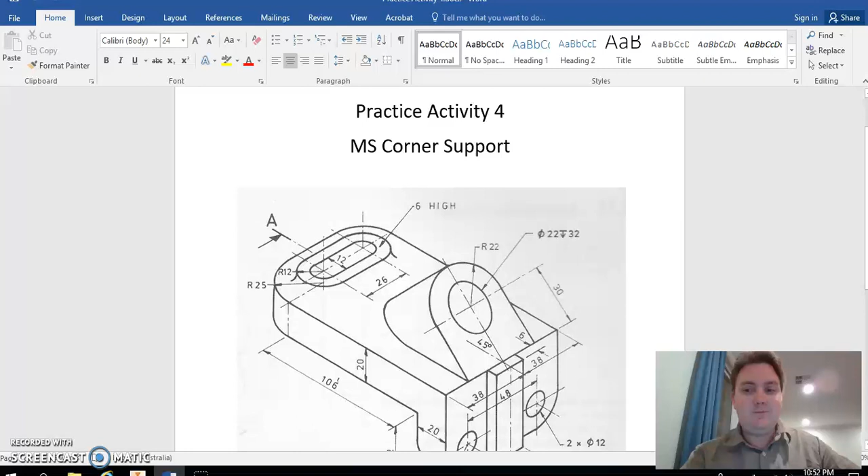Okay, welcome back. Up for practice activity number 4, the MS corner support.

Okay, now this one has some tricky features. It's got this embossed slot here with a radius, a fillet that goes all the way around. It's got this 45-degree feature here, so that's going to trick a few people. I've seen it done numerous ways. Some hard ways and some easy ways. I'll show you the easy way.

And then the rest of it is pretty straightforward, isn't it? We've got this, we've got some fillets, this little boss here, lots and lots of holes. We've done lots of holes so far, so it shouldn't be too tricky for that. The real tricks are going to be these ones here, this feature over here, and this feature here. Okay, so let's get started.

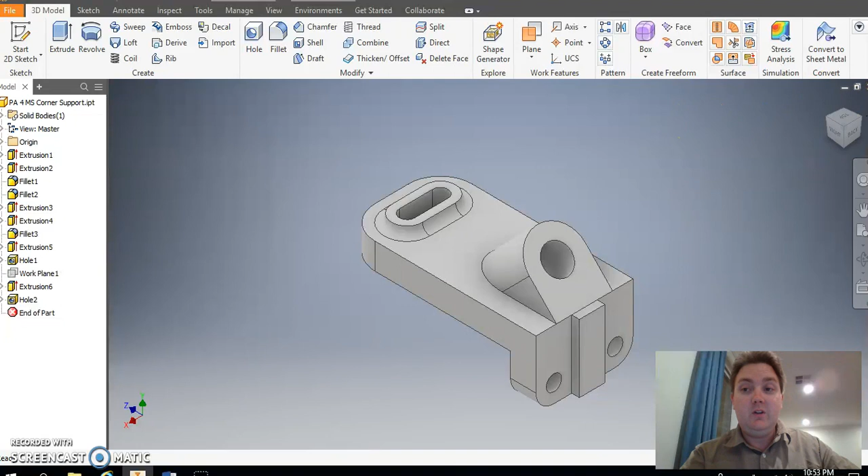Here it is fully modeled. Now I won't go through this because I want it to be a bit of a surprise as we get there. So let me just close that down. Brilliant. New part, new, metric, standard millimeter, hit create. Okay, let's have a look.

First thing I'm going to do is I'm going to create this upper section here. Okay, it's 106 plus 20, so that's 126 plus another, gosh, what would that be? Plus another 25. Okay, so 106 plus 20 plus 25. Okay, and it's got a width of 38 and 38.

Gosh, that's a lot, given how late it is at night.

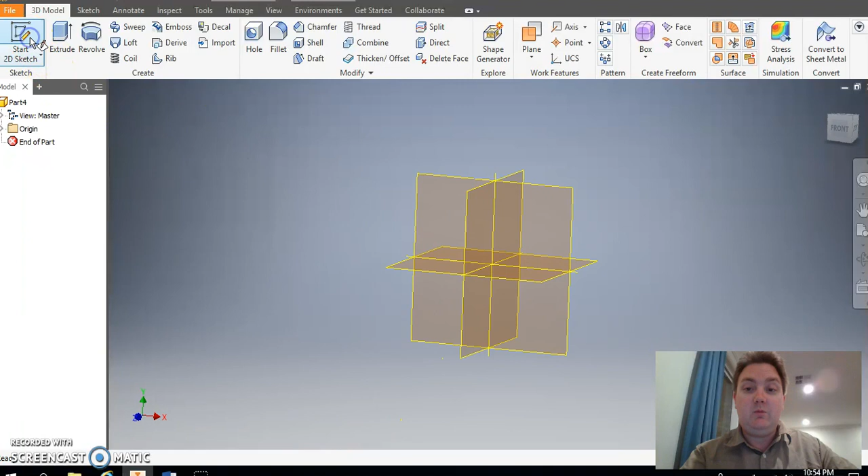So let me just open up this, start with my sketch, and let Inventor do the hard work for me. Let's create a rectangle. Oh, selected that off, cancel that. Let it jump onto the origin point here. I'm just going to click that in, hit OK. Now the first one is 20 plus 106 plus 25.

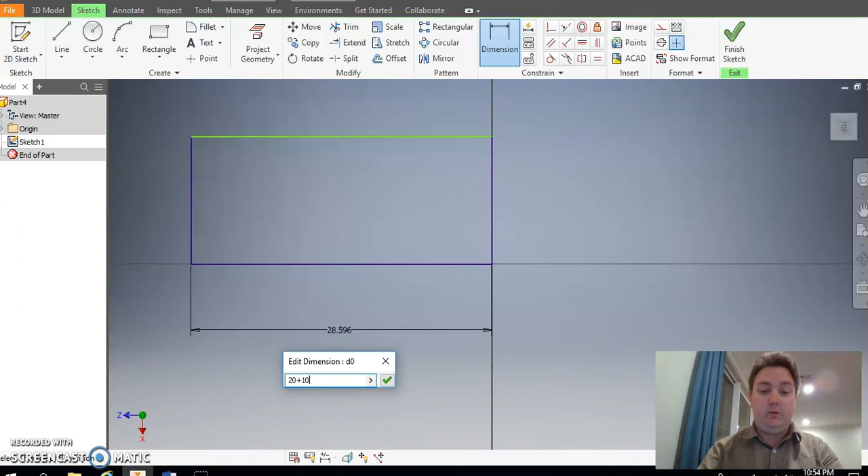So it's 20 plus 106 plus 25. There it is. That's jumped out of screen. Let me hit my top here. See, I'm not doing too good on this one so far.

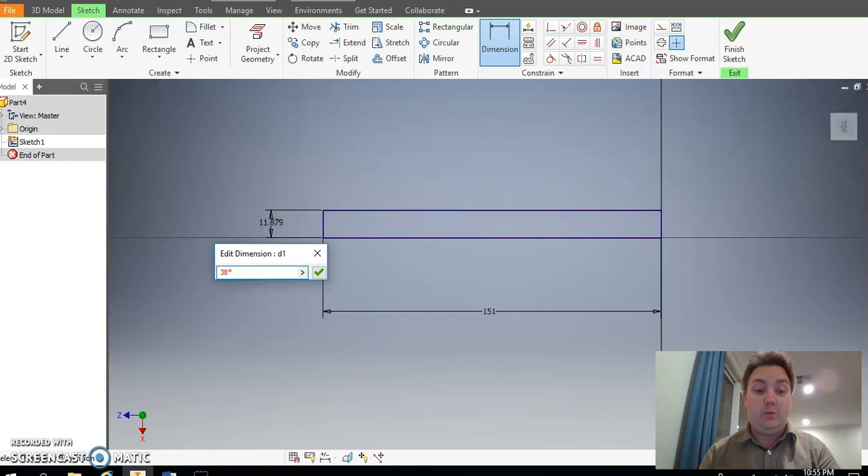And add the dimension in here, and that was 38 plus 38, or 38 multiplied by 2. So let's go 38, and the star button is 2. Okay, or the multiply, sorry. So 38 multiplied by 2, and let's center that. There it is there. Finish the sketch, and I'm going to extrude that down 20 mil.

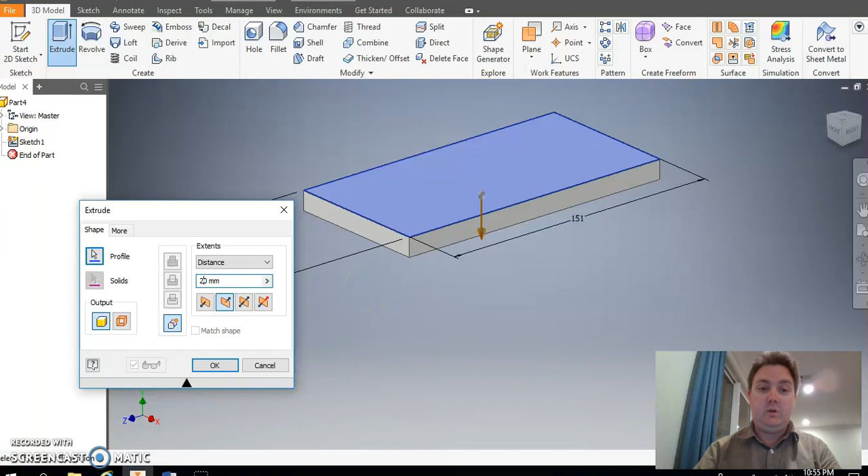Enter. Okay, and I'm going to just rename that. I'm going to call it the top. Okay, I'm going to add 2 fillets on here to create that radius. So it's got a radius of 25. So I'm just going to create that feature now.

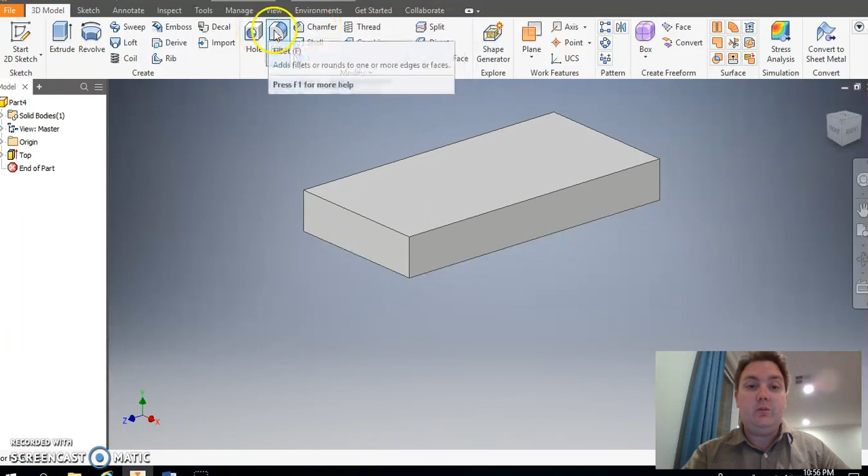Now remember when we added a chamfer? Well, we've got another feature called a fillet. So I'm going to select the 2 edges. That's that feature just there. I can select multiples at a time if they have the same radius. Okay, and that was 25 millimeters.

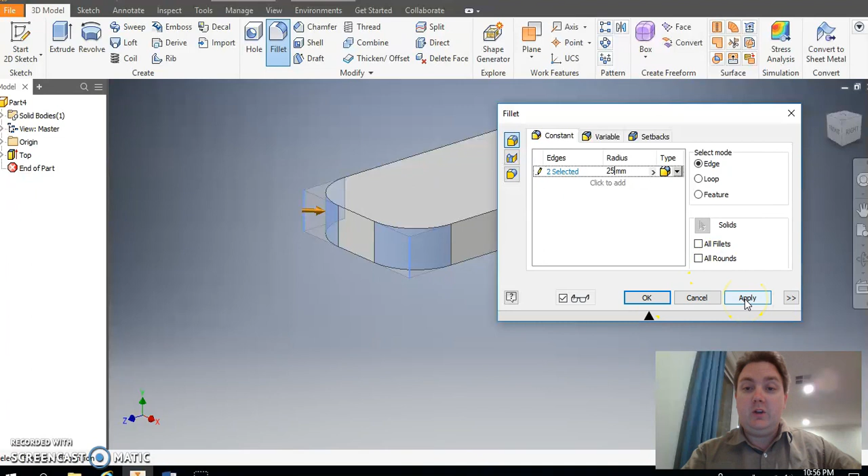And hit OK. If I'm doing lots and lots of them, I can hit apply and then go again and go again. Okay, but since I'm just doing that, and there it is. So there it is back there. Let's create this bit down here, which goes down 32 down from that corner. Okay.

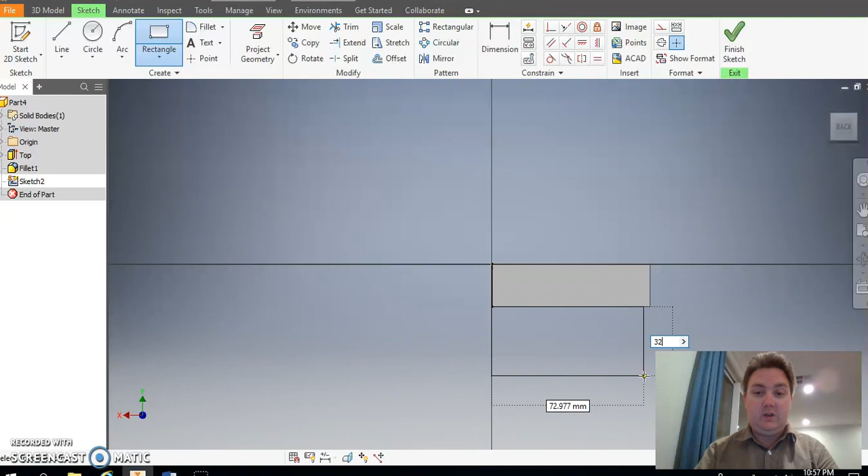So I'm just going to create a rectangle from here, and it'll have a 32 down. And you know what? I'm just going to leave it like that. I'm going to show you a trick. And dimension, this one here. Can I create a dimension between 2 model edges? Huh. Interesting.

I'm just going to delete that. I don't know exactly what the issue was. So what I did is I'm selecting these two edges here. So it's giving me the distance between those edges. It's saying that it's a driven constraint, meaning that the constraint or the dimension already exists. I can't change it, but I can use it to reference.

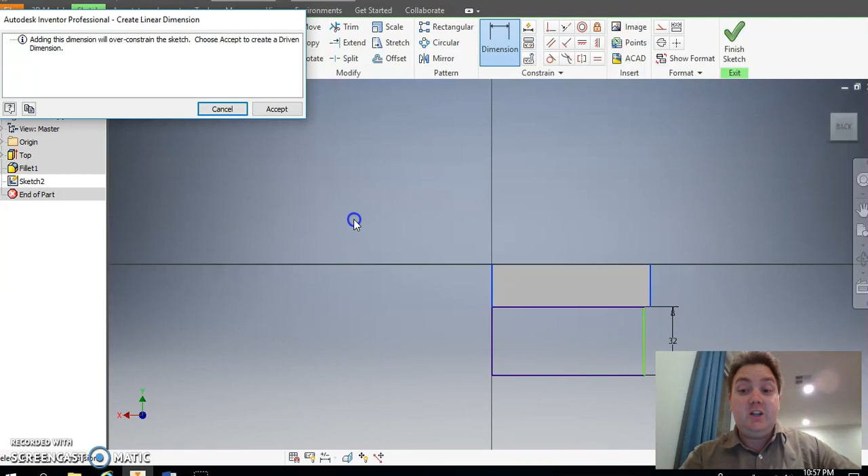So I'm just going to hit accept and see it's a reference dimension or a driven dimension because it's got those brackets on there. So now when I add this dimension down here, I want it to be the same as that one. So all I have to do is select it, and there it goes. Okay, I'll just bring that over there so you can see that. Okay, finish the sketch.

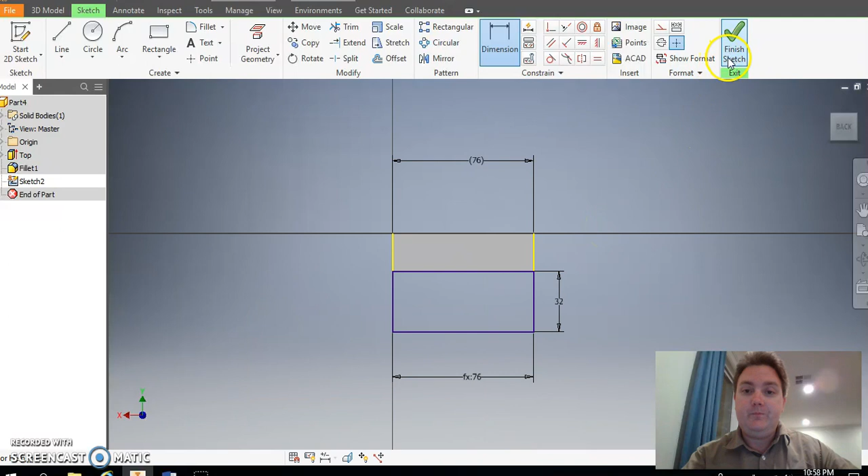And it's got a width of 20. Other direction, join, 20 mil. Okay, there it is, blended in. Do those radiuses, so 14 and 14.

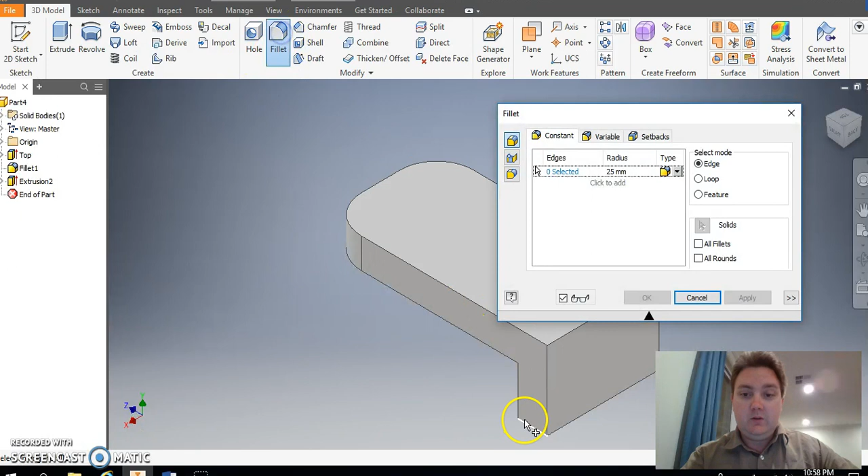So fillet command again, jump over, up 25, 14, hit OK. All right, so I'm moving through some of this pretty quickly now because I'm expecting that you're going

to get the hang of it, and I'll slow down a little bit when we get to the tricky parts. All right, we're pretty much at one of those tricky parts now. I'm going to put this slot in here. Okay, it's going to be done in multiple stages. The first one I'm going to do is going to be 26 wide or between the two centers, and it's going to have a radius of 12.

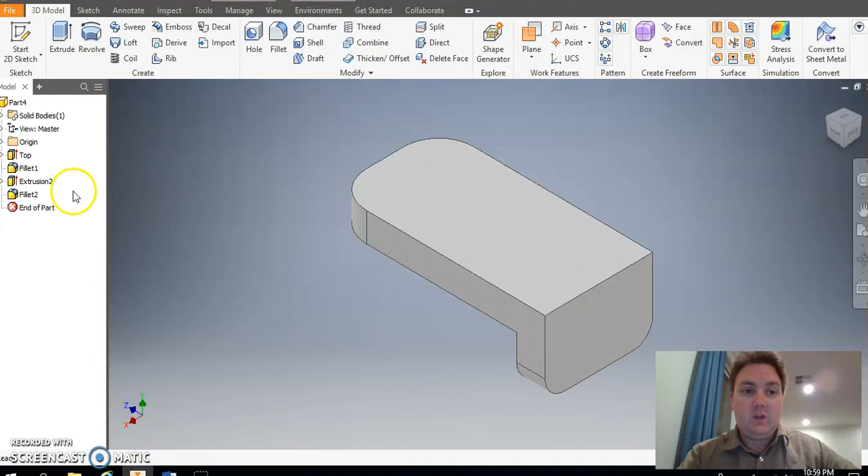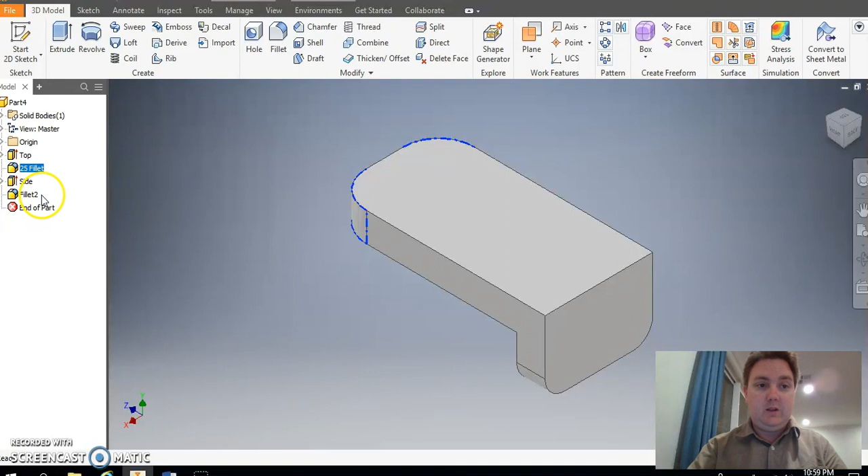Okay, hopefully you got a bit more creativity with the naming than I do. So it's 26 across and it's got a radius of 12.

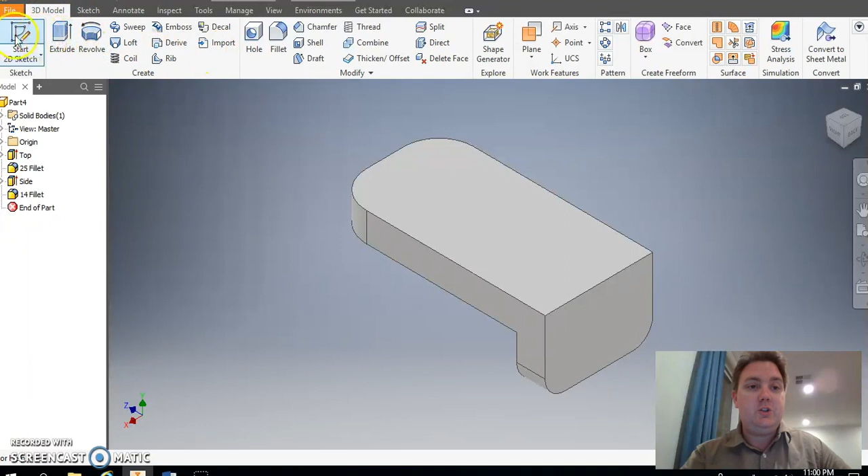So remember, we're going to create a sketch on that plane. We've got, under the rectangle tab, we've got this slot feature. And flies are attacking me at the moment. Just going to pop it in without dimensions, 26.

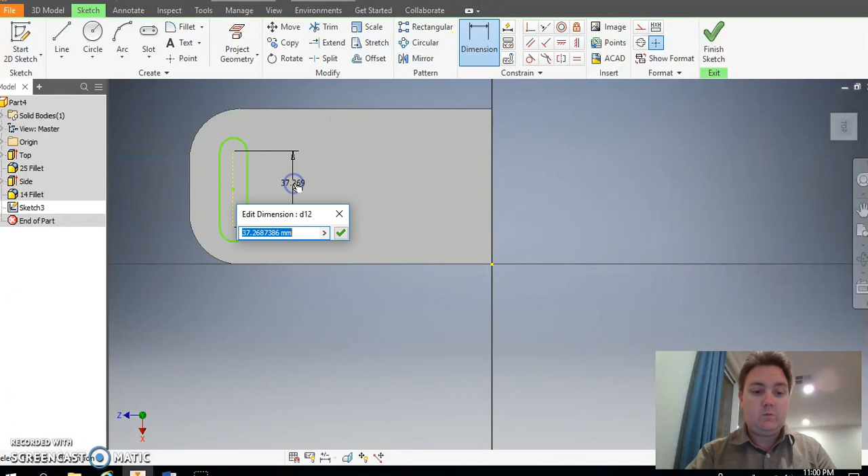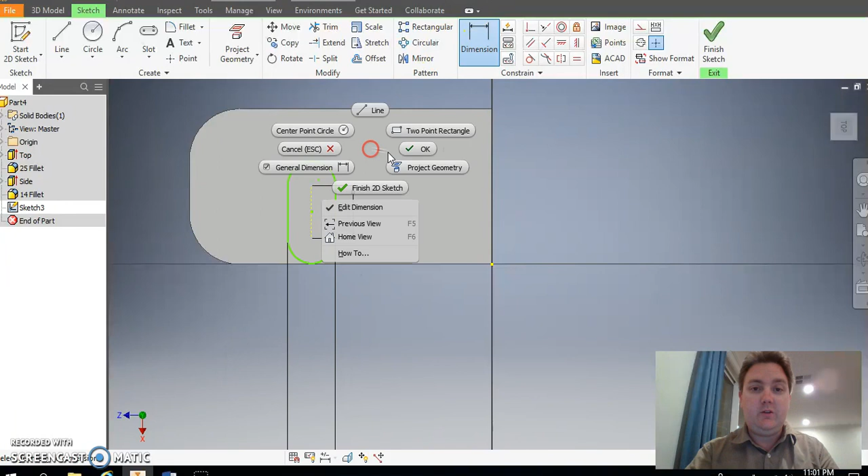And 12, wasn't it? So 12 and 12 is 24. Okay, now it's definitely not in the right place, is it? I mean, that is just so far off the mark. So what I'm going to do is I'm just going to align, cancel.

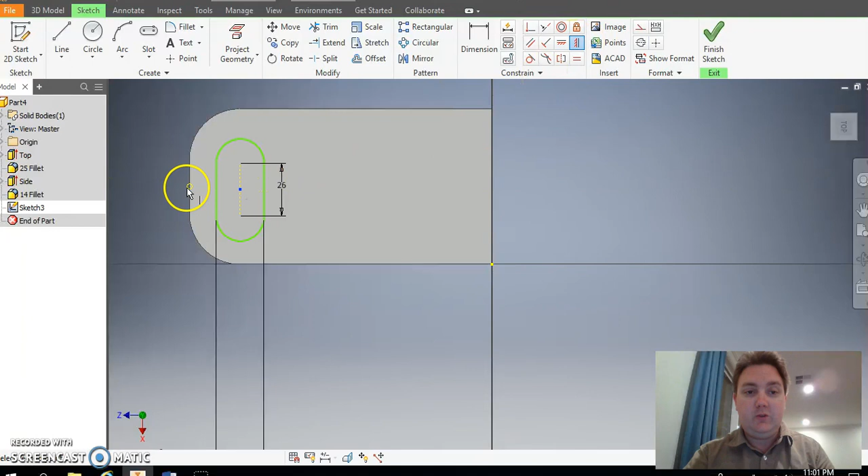I already had that line selected, so that's why it really sort of didn't like it. To get out of that, I just hit escape a few times. And I'm just going to use my vertical constraint here, and I'm just going to line it up with there. Okay, so it's lined up,

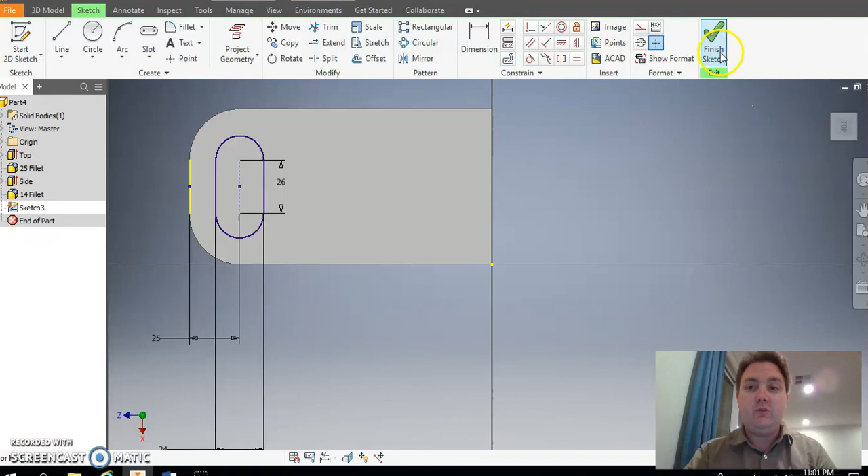and it's going to be 25 in from the edge there, just like that. Okay, now it's fully constrained. Let me finish that. See, it's embossed up 6 mil high.

Okay, so there it is, but it doesn't have that nice little fillet that runs around the edge there. I'm going to use the fillet command. We'll just rename that. I'm just going to call it slot boss.

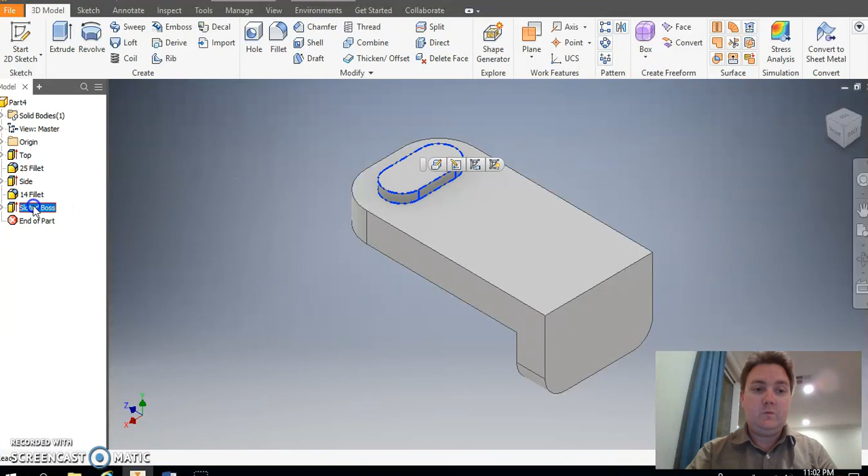Double S, isn't it? I have to wait for the kids to go to bed before I can actually start doing all this. So it's getting quite late in the evening at the moment. That's why I'm making a few little errors.

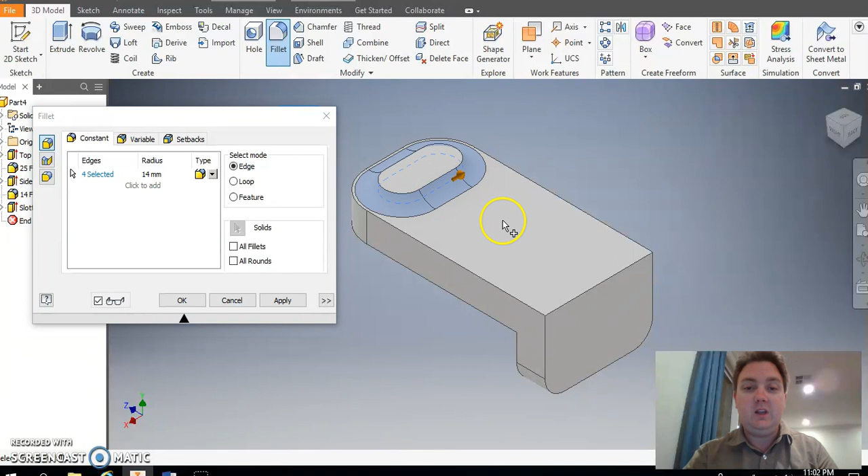Okay, so using the fillet command, select the fillet command. I just need to select one edge. It will chain the rest of them together there. And I don't want it to be 14, I need it to be 6. Okay, because that's the height of the boss.

And then hit OK to lock that in and just rename that 6mm fillet.

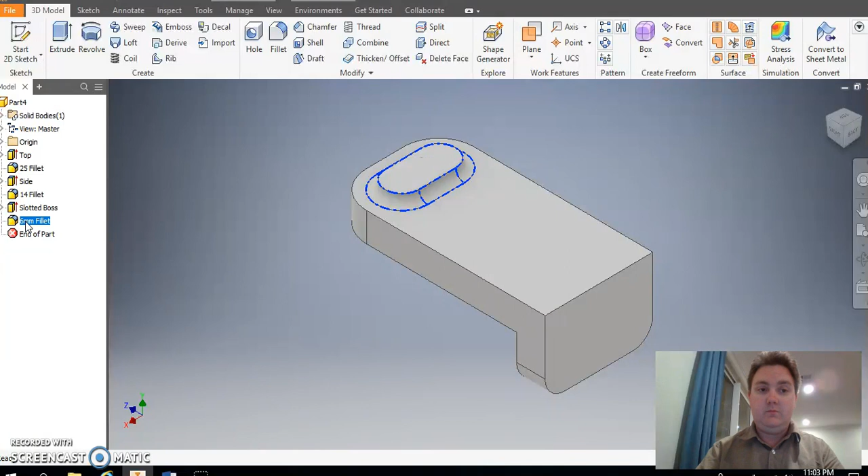Great. Okay, let's have a look. So I've got this slot in the middle here. Let's draw that in. I won't go through it. We've just created a slot, so it shouldn't be too hard.

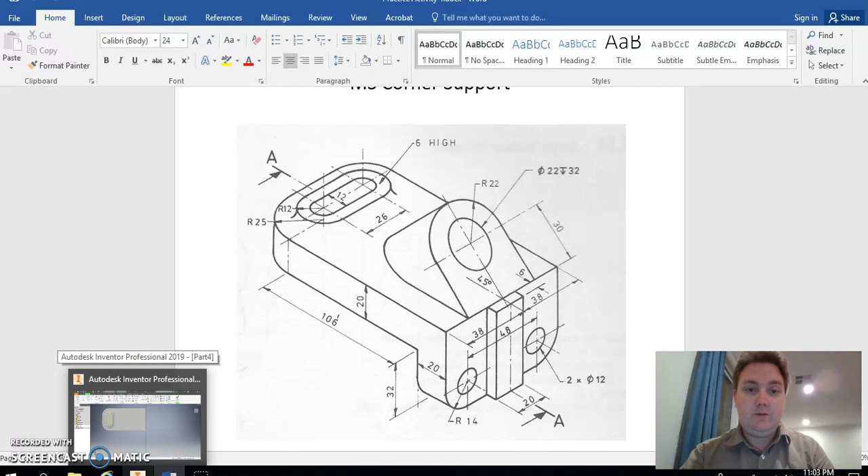It's got a diameter of 12 and the center to center of 26.

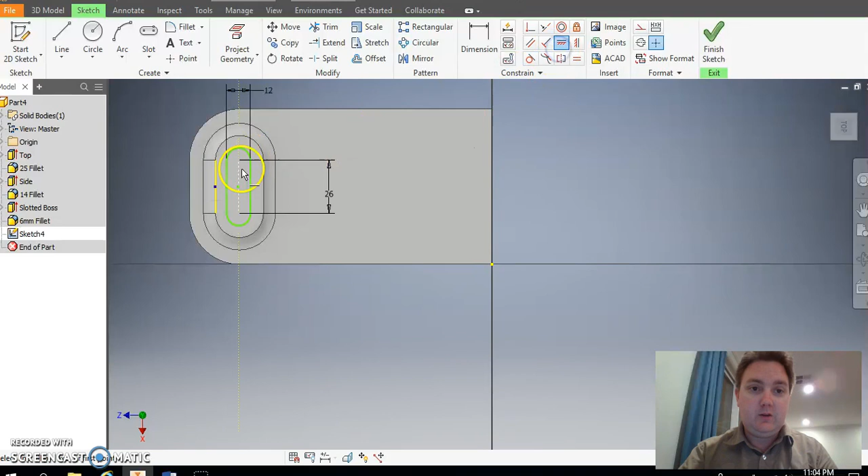Add a vertical constraint. Oh, just vertically constrain it to itself. That's a bit silly. And put that in there. Okay.

Extruding that down, make it 50. Make sure it's cut. You can see it's poking out the bottom here. Hit OK. All right, fantastic.